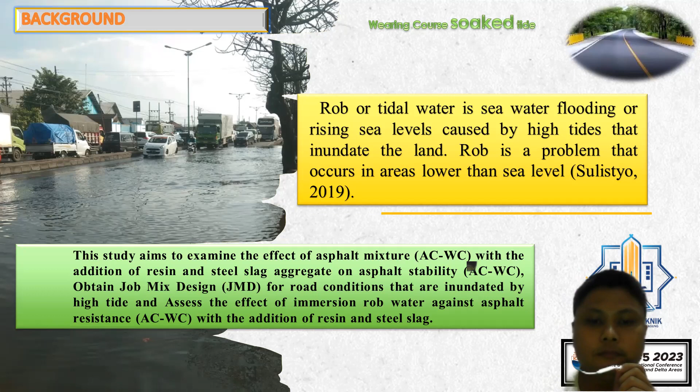The big one, this is similar to what I said before. Professor Jenna Jambeck said marine debris is dominated by plastic bags and unsold plastic with 62%, and Indonesia sits in second place after China. It is estimated that 10% of the world total plastic weighs around 0.48 until 1.29 million metric tons, ends up as marine waste.

The case of the marine waste, or the waste on the beach, is very interesting for research because we hope the beach is clean, but some people do not. This is very important so we can keep the beach and help all our people have a clean beach. Research on asphalt polymer began in 2004 and early 2017 with a focus on use of plastic bags.

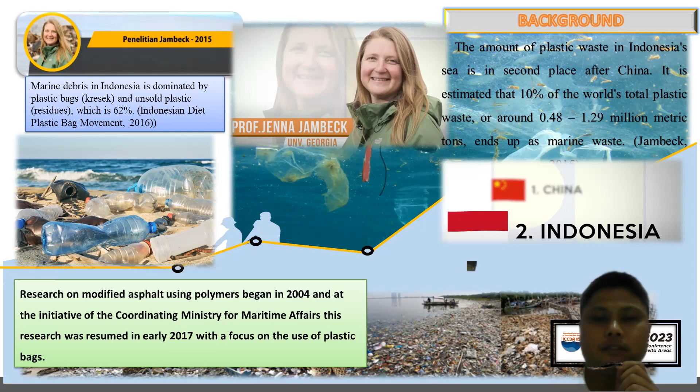The second purpose is to obtain a job mix design for the submersible road condition. Yes, we can find the best job mix design for the wearing course. This is very strong for the immersion water, especially for the tide water. We have two methods, for the tide water and for the water from the rain.

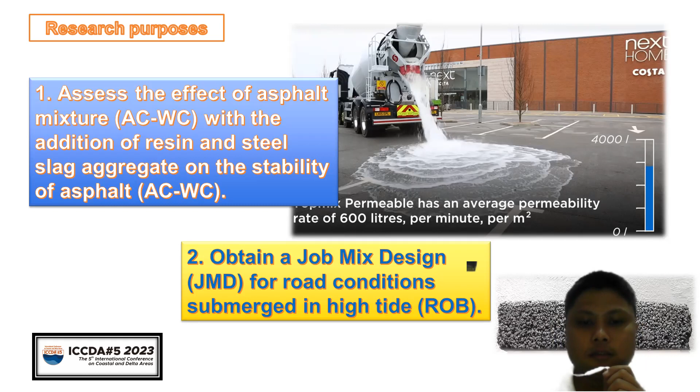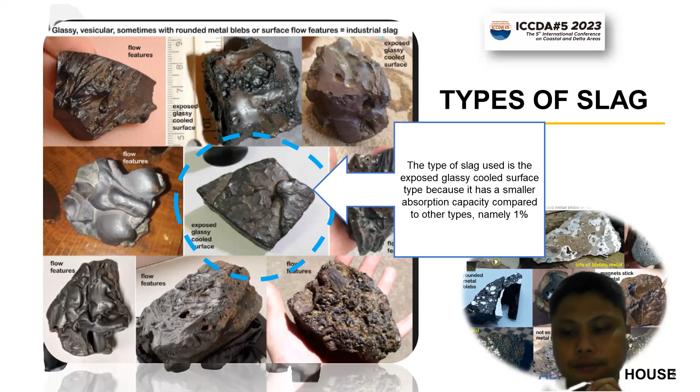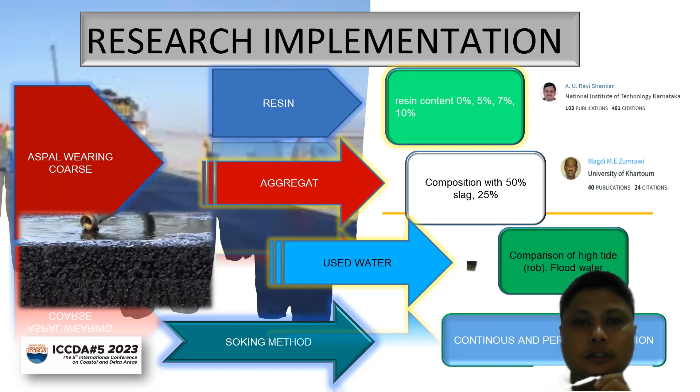The research implementation: there is one resin material. The resin content is 0%, 5%, 7%, and 10%, and the aggregate composition with 50% slag and 25% slag. As usual, there is the comparison of the high tide water and fresh water. The soaking methods are continuous and periodic immersion. For continuous immersion, there is 7 days of immersion, and then Marshall testing.

14 days immersion, and then testing, 21 days immersion and testing. We hope for 21 days. I know 21 days is not maximal for water absorption, but we can know this stability for the wearing course in 21 days. But we hope that in the future the asphalt wearing course has the best stability. Maybe we can immersion this asphalt wearing course in 1 year and have the best job mix formula.

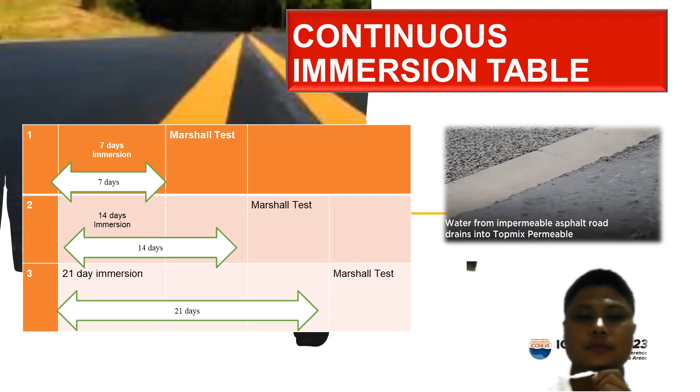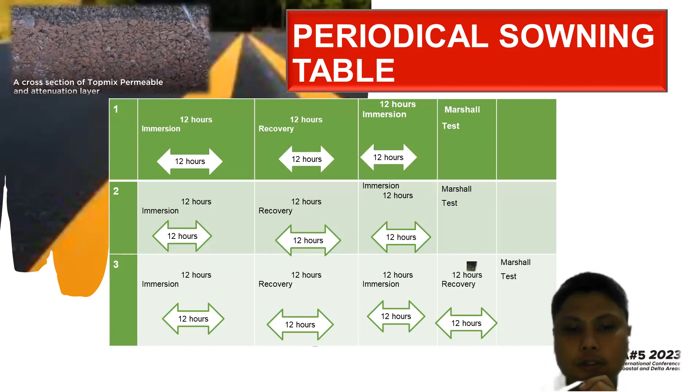And the periodical soaking table: we can do 12 hours immersion, 12 hours recovery, 12 hours immersion testing, 12 hours immersion, recovery, immersion testing, and 12 hours immersion, recovery, 12 hours immersion, recovery, and immersion testing.

The parameters are stability, flow, void in mix, void in mineral aggregate, void filled with bitumen, and Marshall Quotient.

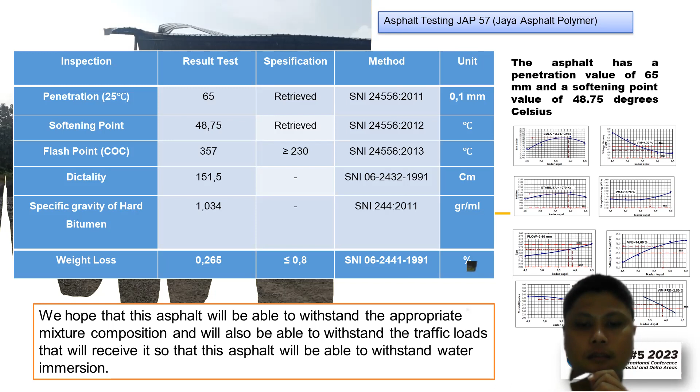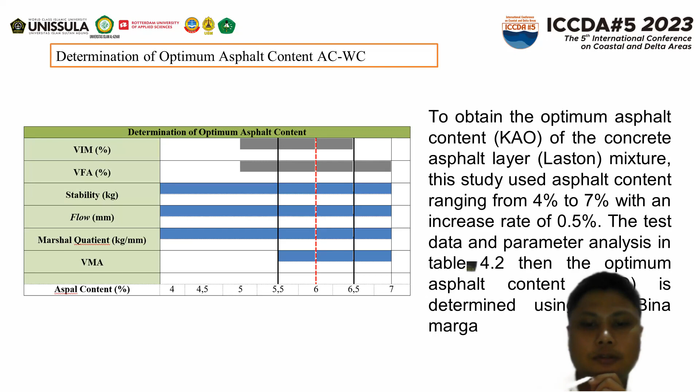The method of optimum asphalt content: to obtain the optimum asphalt content (KAO) of the concrete asphalt layer, we used mixture asphalt content ranging from 4% to 7% with an increase rate of 0.5%. That's the data and parameter analysis in this table. Then the optimum asphalt content we use is shown in this portion for this research.

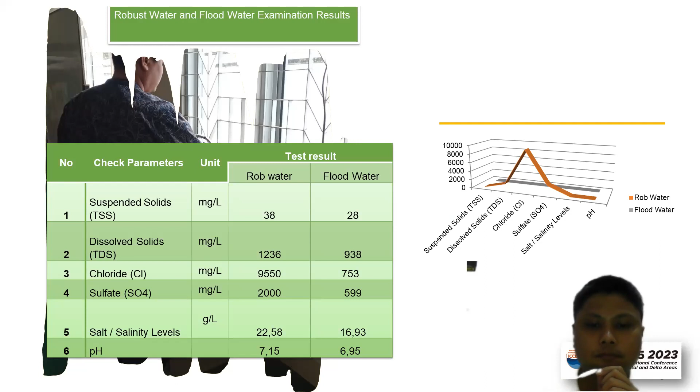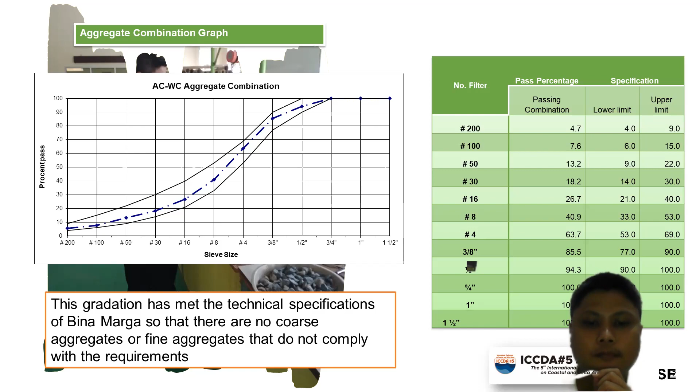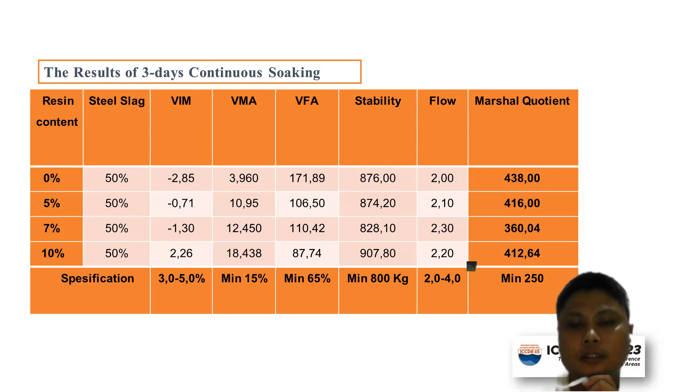For the result of demarcation of the asphalt content, the result of 3 days continuous soaking, namely at 25%, 50% slag with 7% and 5%, 7%, and 10% resin content, does not meet specification and cannot be used as road pavement.

As for the specification of Bina Marga, it's at 3% until 5%.